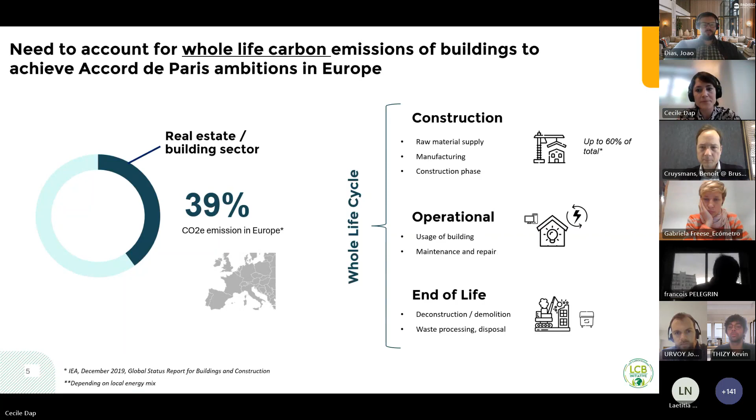But to adopt this whole life carbon approach, to reach this counting of carbon in the entire life cycle, there are still some barriers in Europe. The first of them being the lack of harmonization of the way we count carbon in Europe. There is, of course, a solid background of norms defining life cycle analysis. So you must know EN 15804 and so on.

But there still are multiple ways of using those norms. So because of this, for the European players, it is still complicated, even sometimes impossible, to compare the carbon footprint of buildings across borders. And because of this, it's also quite complicated to actually say what a low carbon building is in Europe.

And there's a recent Ramboll study that has been conducted for the EU that has said that most of the real estate players in Europe also think that it's necessary to have this single, same way of measuring the whole life cycle of buildings across the EU.

We also have a lack of transparency in the way we highlight buildings. So in Europe, we have lots of certification schemes. You must know most of them, but most of them are multi-criteria certification schemes that do not give carbon the central place. And when they account for carbon, it's very difficult to find the carbon result and highlight the carbon result within those certification schemes.

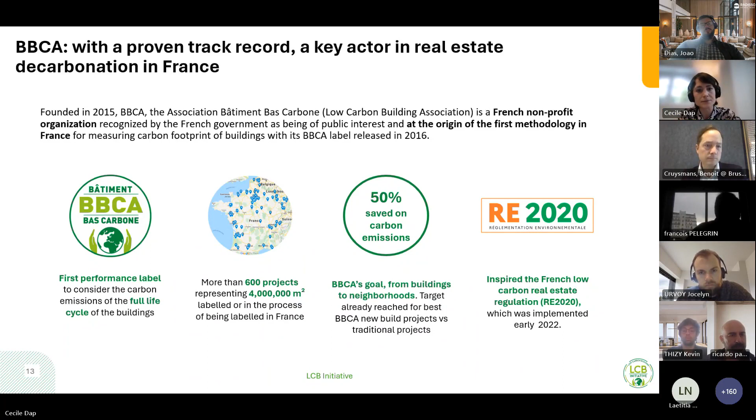So to come back quickly on the history of LCBI: it was launched in March 2022. The initiative has been a process of European policy and methodology benchmarking, then a definition of a first version of the methodology that was published in March last year. From then we gathered lots of feedback on the methodology, and we were able to test it on a pilot project. We have recently published this new version of the methodology and certification scheme in January this year.

I would say that this feedback process with more than 50 experts on life cycle analysis in Europe, and especially the testing of the methodology on pilot projects, was really key for us to not only have a theoretical methodology that works, but also something that can be used by real estate players on the ground, and people from all over Europe who were able to tell us that it works for them.

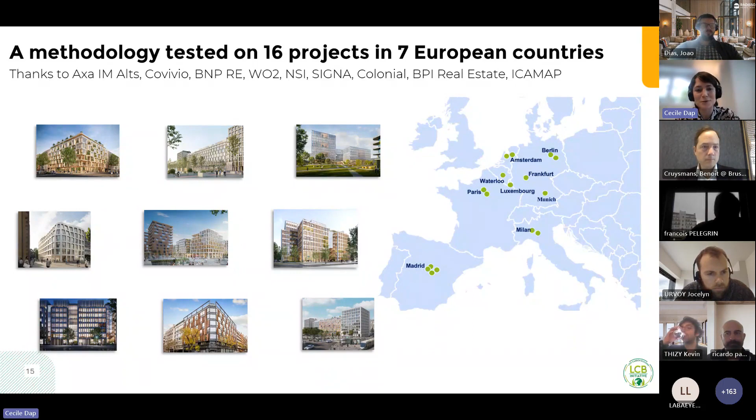So thank you again to all the contributors to this initiative and the pilot project teams.

Thanks to this process, we have been able to come to something that could be divided into two parts. On one side, the reporting methodology, so the way we account for carbon, that is meant to be applicable to any use cases and any building assets. So it could be used in any use cases you can think of. On the other side, the application of thresholds and certification schemes that are applicable only to specific use cases, because when we define thresholds, we have to define them for use cases and specific countries.

So for this year's publication, the certification scheme is applicable to new construction, offices, residential, and hotels, and in 8 countries: Belgium, France, Italy, Germany, UK, Spain, Luxembourg, and Netherlands.

So I'm going to now give the floor to Jocelyn and Kevin, who are going to present you in detail the new construction methodology, thresholds, and the way they have been building this whole work.

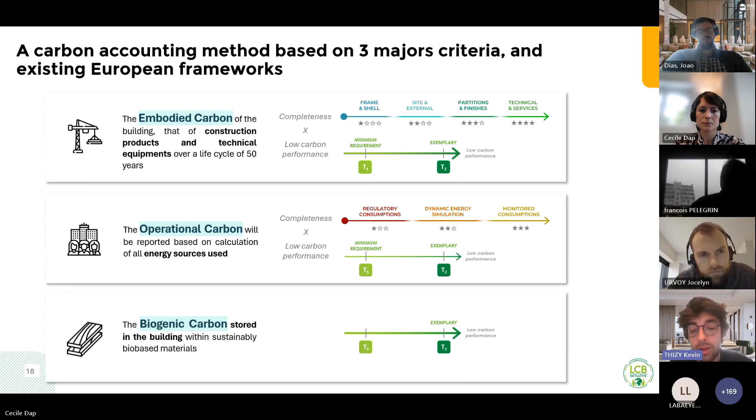If we can switch to the other side, yeah. So to have a quick overview, those 3 criteria are evaluated and assessed with basically 2 tools. The embodied and the biogenic carbon is assessed with an LCA calculation over 50 years. And as I said, the score reached will be a combination between the completeness and the target reached.

And for operational, the energy consumption calculation can be made by calculation on software and/or also based on monitored consumptions. So again, we combine performance and completeness, and the consumptions are assessed on a yearly basis. So the 3 criteria are combined, and then we assess the number of stars and targets obtained, and then we reach the LCBI final rating, beginning with standard, then performance, then excellence. We'll see it after that.

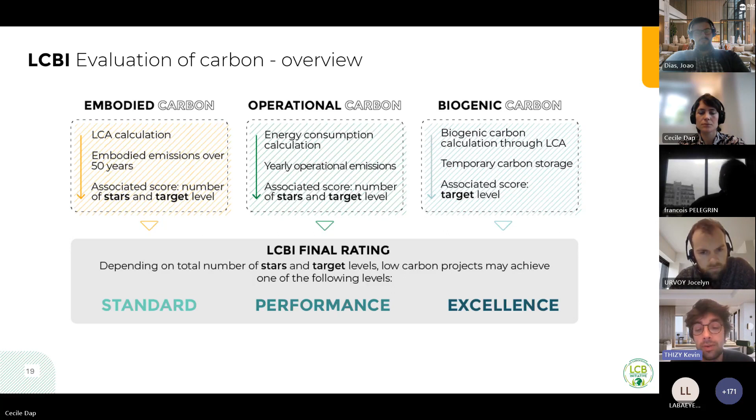A bit of elements on the embodied carbon knowledge. An important element is the reference area. We refer in LCBI to the IPMS2 reference area, which is defined by the standard IPMS without the component H. So it is in the definition of the standard, but you have all the surfaces, the areas that are excluded - basically balconies, covered galleries, internal car parking and storage room.

Then we assess the embodied carbon on the scope defined with 4 macrolots. It is inspired from LEVEL(s) and also RICS allotments. Again, we have to be at the crossroads and also give LCA practitioners a real way to assess based on what the projects give information to them.

So those 4 macrolots start with frame and shell. If you assess only the LCA on the frame and shell, you reach 1 star. Then if you assess the site and external products of your building, you reach a 2nd star. After that, if you go into your building and you assess the partition and finishes, you reach a 3rd star, which we assume is mainly the way to assess LCA for what we saw actually. And after that, the 4th star is when you assess the technical and services of your building, all the MEP.

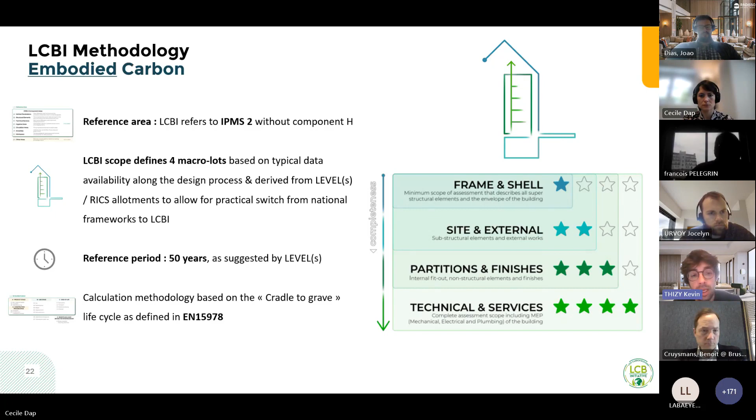Here you see all the life cycle stages that you can assess for your building, from A1 raw material supply to C4 disposal in end of life stages. And for embodied carbon calculation, we require to have emissions, CO2 emissions, on all these stages. So if EPDs are used without emissions on some of these stages, it will have to be completed.

For example, if you have EPDs only on A1 to A3, which is cradle to gate EPDs, you will have to complete it, whether with a software or with assumptions. So yeah, embodied carbon is calculated on that.

As I said before, biogenic carbon storage is an isolated indicator. So all the storage permits with biogenic products will be assessed on this indicator from A stages to C stages.

And operational carbon, which is also CRREM and Scope 1 and 2 compliant, will be isolated also to get to be the third criteria. Just note that D stages will be reported separately and not accounted in the embodied carbon.

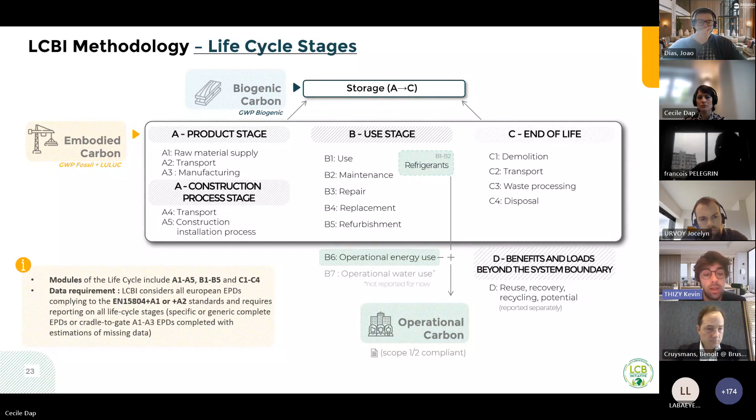And in LCBI, just to be clear, we allow to use EN 15804 plus A1 and plus A2 EPDs, assuming that they are completed on the scope A1 to C4, fully completed.

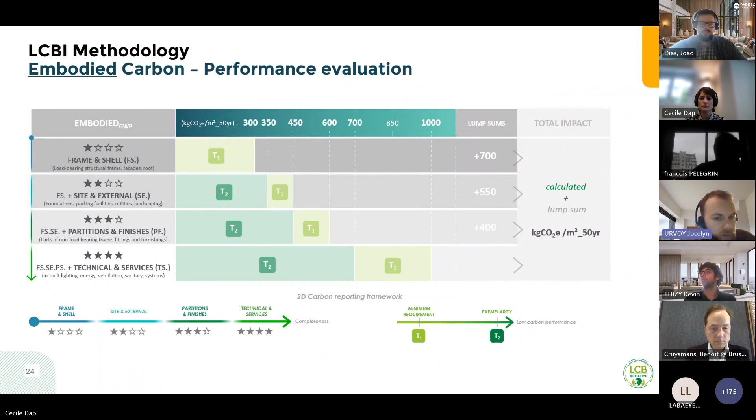You'll find this principle being repeated also for energy and operational emissions. I'm going to explain a bit how the thresholds were set, because it's been quite an interesting process as well. Throughout the LCBI project, we've been able to confront those thresholds to some statistical analysis.

This was thanks to some data initially provided to us by One Click LCA, on which, after some processing to make sure that only high quality and quite complete life cycle assessments were analyzed, we ended up with a sample of a few hundred projects. We could assess the amount of carbon on each of those cumulative scopes: frame and shell, site, then frame and shell added to site and external components, and then partition and finishes.

We also have technical and services, but this is not deemed to be robust enough at this point in terms of quality of the MEP assessment. On this statistical analysis, you see median and mean values, and also what the top 25% is, which was quite useful to then compare to where we thought the thresholds could be.

That's the next slide. The main principle here, and it's not perfect science but it's quite a good indication, was to see that the T1 target was, especially on the third star - once you go as far as the partition and finishes assessment - quite similar to the top 50% of those LCAs deemed complete at this point. And the T2 target is quite aligned with something like the top 25%.

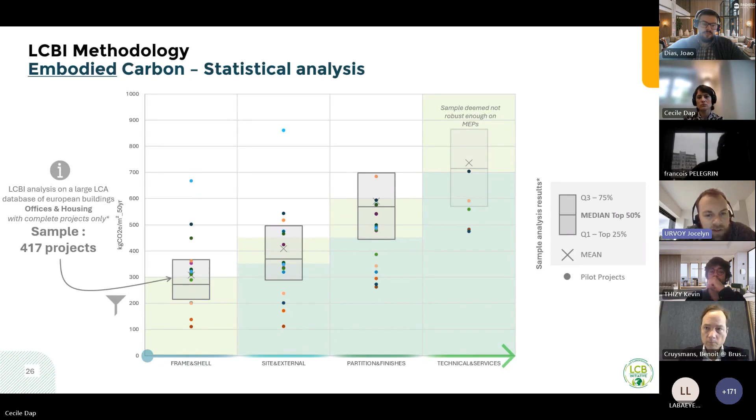This is quite a complex slide, but also something that I'm sure would be of interest to many of you. We've tried to compare how those thresholds position themselves against some other key initiatives, such as the national regulations in France or all the initiatives that are going on in the UK, or the science-based targets.

So here you see a sort of representation of the T1 and T2 values on whole life assessment as per LCBI on the right, a sort of indicative projection of what this would mean in terms of upfront carbon, so only stages A1 to A5. This is only indicative, but that's how some other initiatives define their targets, especially the science-based targets in terms of upfront. We see a general alignment.

It's not so easy to compare things apples to apples, but overall it seems that the T1 and T2 targets are based on the same ambitions as some other initiatives, and that's quite reassuring.

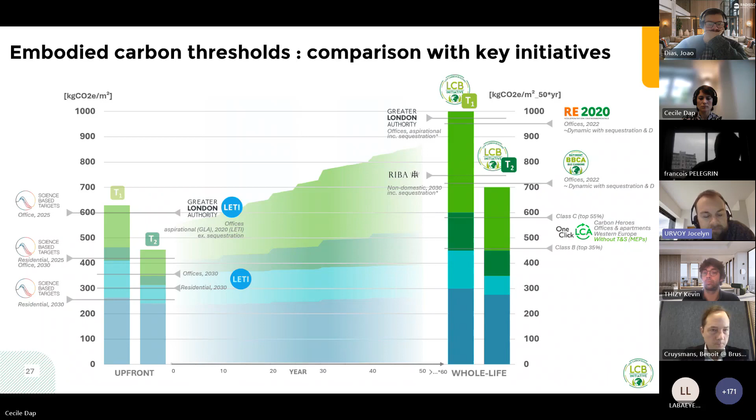Now, in terms of operational carbon, there was some work done to be able to define thresholds, but accounting for the very differences between countries in terms of the carbon content of the electricity and also some other differences that may be expected from one country to another. The first one was to find how to define the scope of the calculation.

We know that the national calculation methodologies that should follow the EPBD are meant to report energy consumptions on 5 main usages, so heating, cooling, ventilation, hot water, and lighting. But this is only one small part of the energy consumption, and some more complete assessments are also quite useful to be made based on dynamic energy simulation or even monitored consumptions for those buildings that have been delivered already.

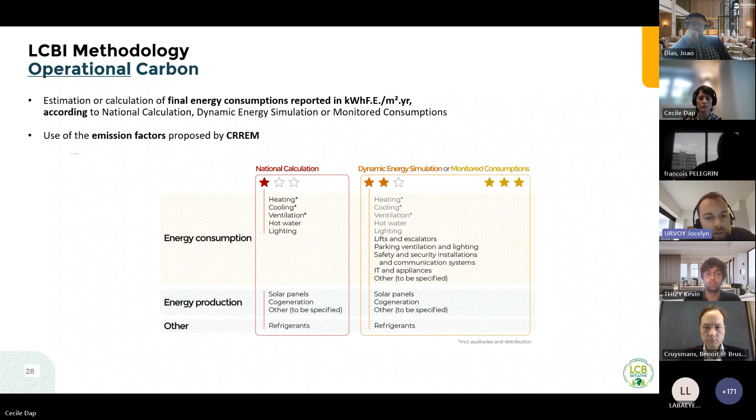And once this assessment has been done in terms of energy consumption, taking into account the refrigerants and the energy production that may be on site, there's the need to translate it into carbon emissions. For this, we based the analysis on the CRREM emission factors, thanks to the very valuable and high quality work that was done by the CRREM, and this is the source of data that we chose to be able to define the thresholds. I'll go a bit more into detail on what was the process for defining those thresholds.

So basically, we carried out 2 sets of generic simulations with 2 sets of design parameters. One that would be the base scenario, and one that would be the best scenario in terms of all the assumptions that you make when you carry out an energy simulation. So we did that in 3 cities in each country, just to understand how the energy consumption would vary from one country to another. Some countries need more heating, some countries need more cooling, and overall, we can see that it's actually not so different from one country to another.

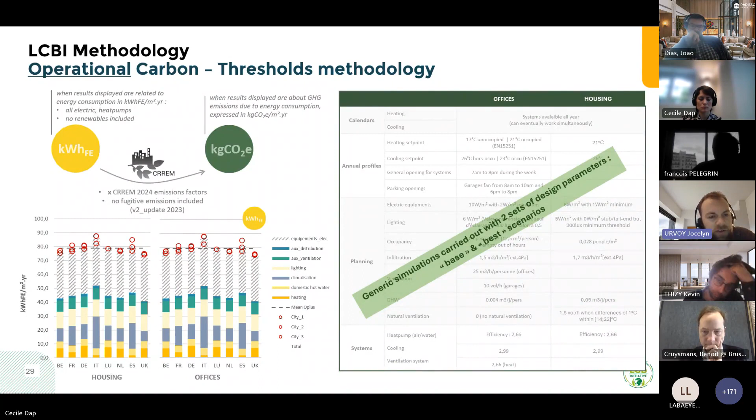This was then translated into CO2, that's the next slide, based on the emission factors from the CRREM in the 2024 set of emission factors from one country to another. So from there, when we talk about carbon, then there are very significant differences. That's based on the electricity grid from one country to another.

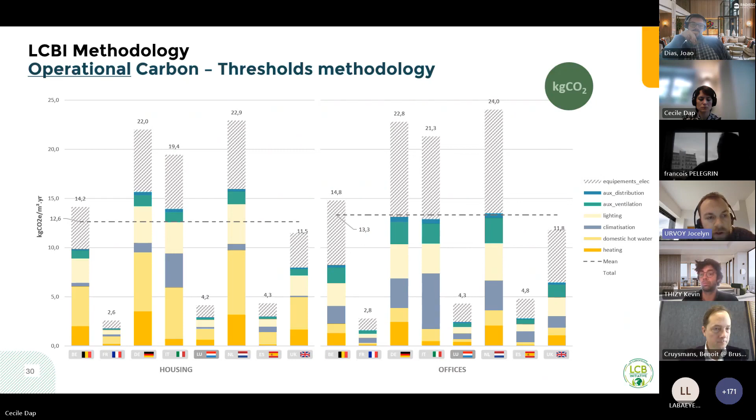And this set of data was then used and compared to some other benchmark that was given to us by the CRREM. That's the next slide, where you see here on the left the energy consumption, and on the right the associated emissions.

So on those two charts, what you find on the left, the orange line is the energy pathway set out by the CRREM, where you see that there's a sort of flat value after 2035, which is what the CRREM expects from the average building stock, and could be quite a good proxy for new buildings. And then you see our base and best scenarios, how they position themselves in terms of energy consumption that was simulated. And this was also useful to help us set thresholds. When you translate it into CO2, then you jump to the right-hand side chart.

This flat value after 2035 is the orange dotted line on the right, which was our basis for the T1 target on energy consumption. This was quite useful to compare how the base and best scenarios were placing, and basically the T2 target is usually set quite close to our best energy consumption scenario.

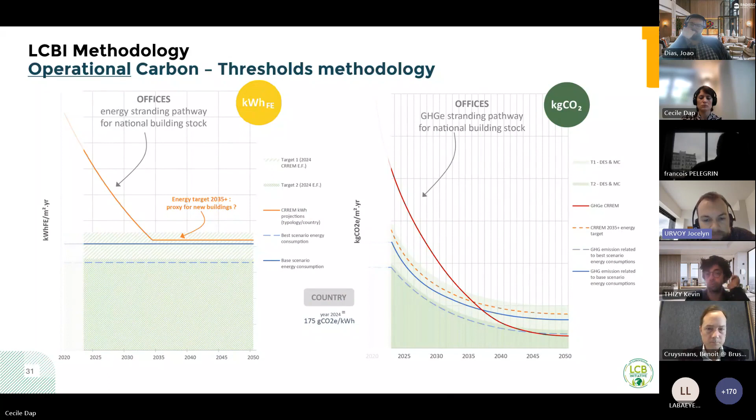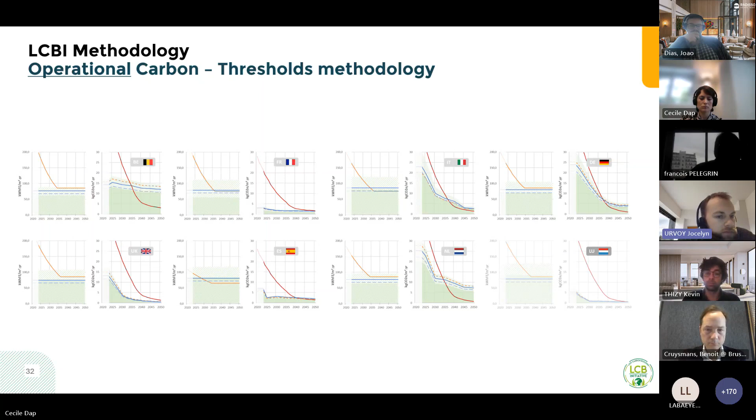So this was a generic representation, but the work has been done for every country, and that's how the thresholds were set. I think this is all available in the LCBI methodology, and that's how you end up in the next slide with this rating framework. So the requirements vary from one country to another based on the electricity grid. There were some assumptions made in terms of energy supply, but basically electrification is one of the key assumptions that was made.

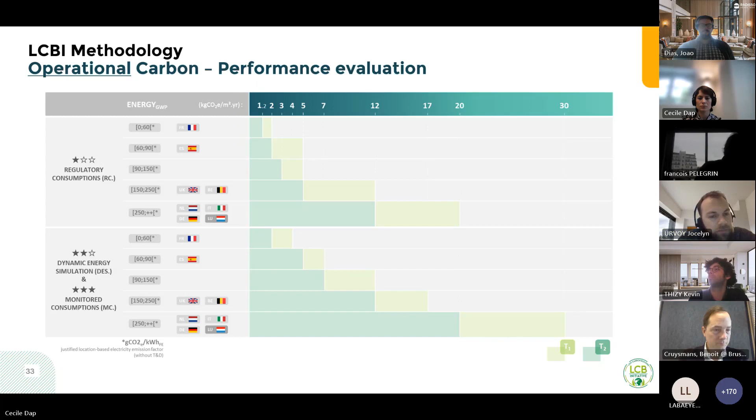Yes, I'll take the microphone.

To continue on the third major criteria, we are now on the biogenic carbon storage. So this isolated indicator has been made in the LCBI methodology in order to align with a kind of consensus across Europe. So the biogenic carbon storage is expressed in kilogram CO2 equivalent per functional unit given by the EPD. Also, when you do LCA, you report it separately, and this is made in order to value the carbon stored within the building at any point in time of the LCA.

So it is neither deducted in A1-A3, nor added in C modules, as it can be in some of the countries' national calculations. So this also values alternative sourcing of carbon intensive materials without hiding fossil emissions, because that's what was made with, for example, the EPDs made in 15804+A1. We cannot see the biogenic carbon storage. It was summed in the overall emissions of the product. So now we can see how the building participates in the storage of the carbon emissions of the atmosphere.

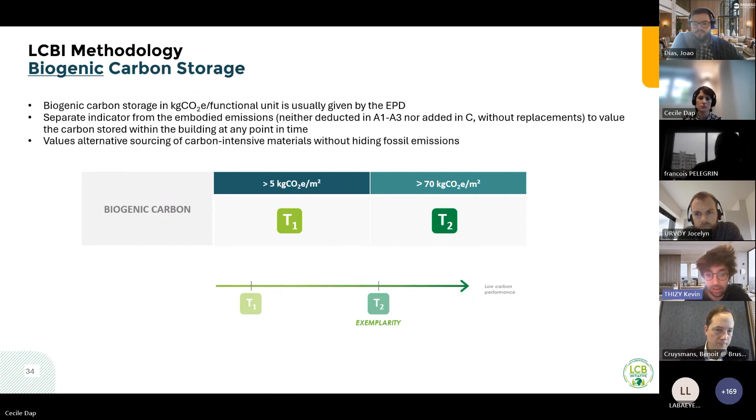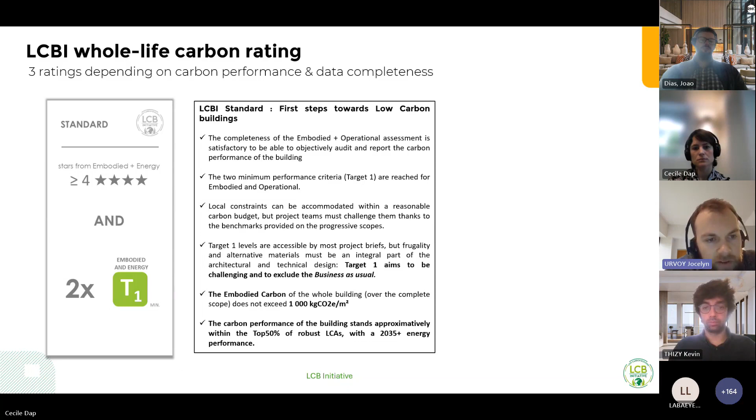The next level is LCBI performance, a bit more challenging. We expect those projects that reach LCBI performance to align with the best practice in terms of completeness of the assessment. At least one target 2 must be achieved, and this means really trying to find the balance between energy performance, site constraints, and efficient and low carbon materials. And this is something that should inform the design process, the project brief, and be quite a thorough work to be carried out so that the performance level can be achieved.

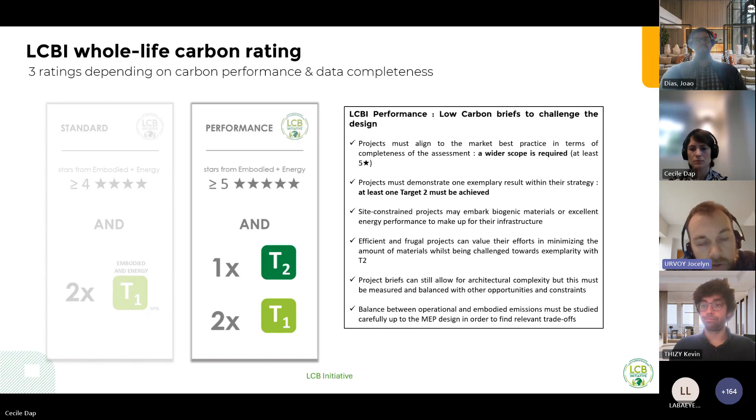And then you've got the excellence, which is really meant to highlight those projects that have been exemplary on all the work they've done. The assessment is meant to be as complete as it can be as of today. It really should be an effort to challenge the design on all types of works and find a very challenging energy performance, so that those projects could land within the top 25% of those projects which have consistently reported their emissions. And basically, this would mean having reduced their carbon emissions by at least 30% over the entire life cycle compared to what we see as business as usual today.

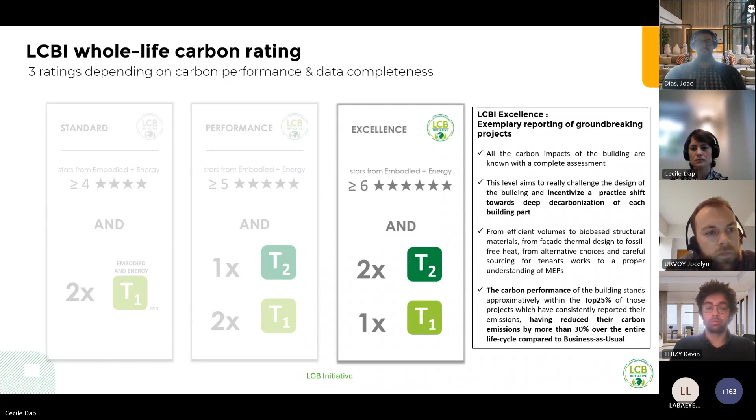Thank you, Jocelyn. Thank you, Kevin, for this detailed presentation. I can see there are lots of questions on this in the chat. I suggest we take them at the end of the presentation or answer them now in the chat. So as next step, we're now going to present you the certification process and also a bit more on the LCBI initiative.

So as we mentioned earlier, this LCBI, these thresholds that have been defined and the certification scheme that is going to be audited in 8 countries by Bureau Veritas, is available for new construction, offices, residential, and hotels. And in those 8 countries, of course, it's the first step of addressing more categories of assets and use cases in Europe, and also more countries. So if you're ever interested in working on one or other subject, feel free to contact us to extend this LCBI certification scheme.

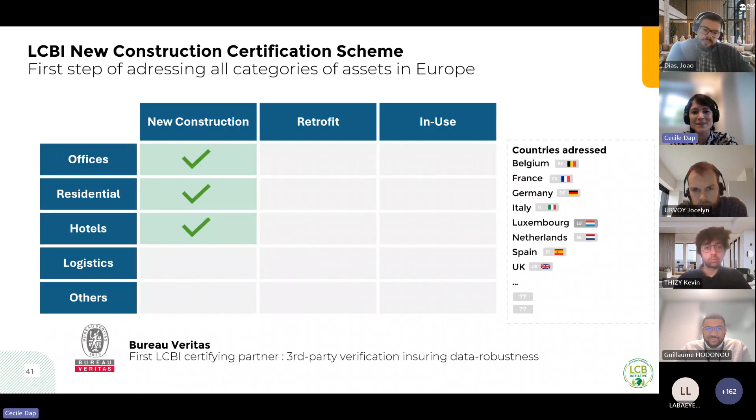I'm now going to give the floor to Guillaume from Bureau Veritas. So Bureau Veritas is the first partner certifying LCBI in 8 countries. And just a quick word on this: having a third-party certifier ensures a robust data verification, and also ensures that in the end, all the data that we're going to collect from those buildings are compliant and reliable, and, as I saw a question in the chat on this subject, thanks to Bureau Veritas as a third-party certifier, we also might be able to gather the data anonymously and provide the market with some knowledge on whole life carbon of buildings that conduct this LCBI assessment. So I give the floor to you, Guillaume.

Yes, thank you, Cécile. So as a commercial manager at Bureau Veritas, my objective today is to guide you in the process of obtaining the LCBI certification. It all starts with an assessment of the eligibility of your application, conducted by our technical team based on the information you have provided.

The eligibility criteria, for your information, are defined in the certification standard, which is available on the LCBI website if you want to consult it. Once you are considered eligible, you have the opportunity to be audited and to obtain the temporary certificate, a certification that arrives before the construction of the building.

After the audit, the auditor generates the audit report and monitors the closure of findings based on your feedback. Finally, the certificate is issued within 10 days following the closing of the findings. In a second phase, after the building has been built, you can obtain the final certificate following the same steps as the temporary certificate, including the audit reports, closure of the findings, and issue of the certificate.

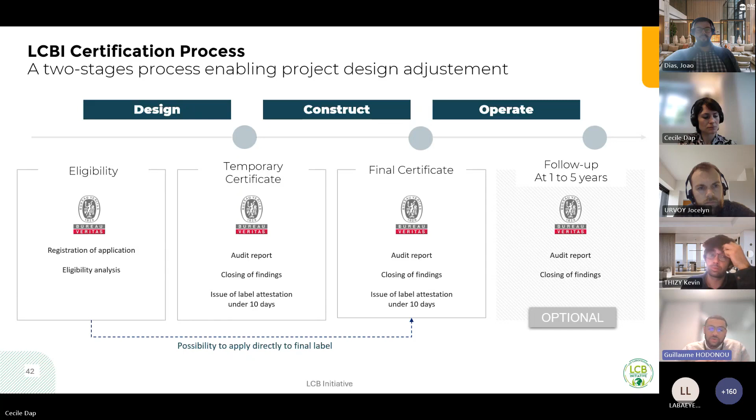Yes, could you? Yes, thank you.

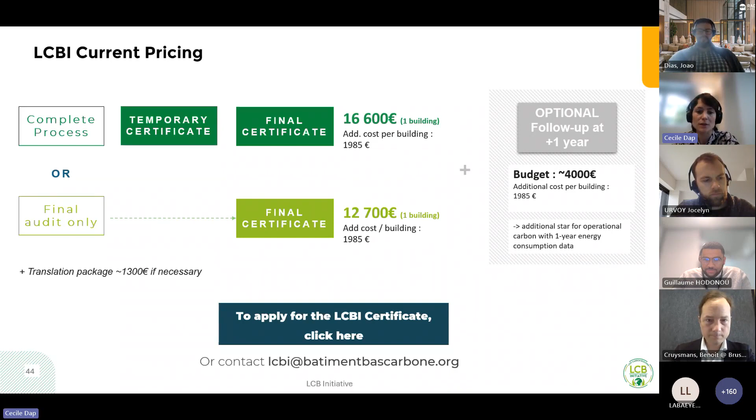Then to give maybe a wrap up on the LCBI certification scheme and what are its benefits, I would say that for the market in general, it answers the needs that we have seen at the beginning, having a common methodology to speak about whole life carbon across borders and with thresholds in order to be able to set some benchmarks and drive low carbon practices for all real estate stakeholders.

More specifically, on the investor side, it will provide them the ability to access consistent and reliable performance data on whole life cycle carbon footprint of buildings. Those data at asset level, thanks to LCBI, will be based on the same accounting methodology across borders. This is actually today something that is missing in order to drive investment decisions according to whole life cycle carbon footprints.

And thanks to this, it will also give them the ability to compare and compute those performance data on carbon footprints at a portfolio level across borders. Then, if you move to project owners and developers, as it was explained very well, and as we also noticed during the application of LCBI in the pilot phase, LCBI can be used as a low carbon design tool along the entire design and construction process.

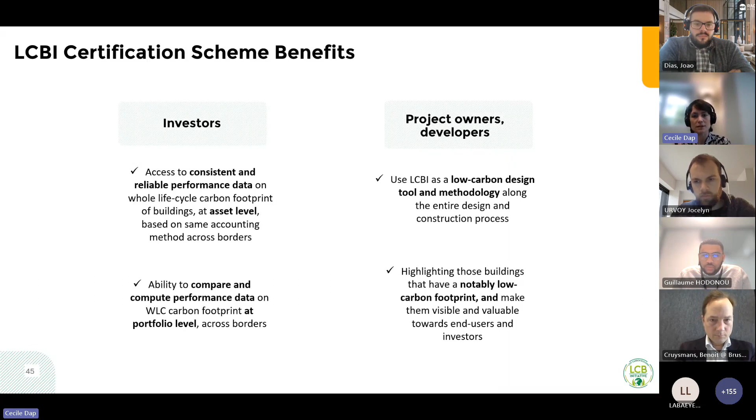So to answer some questions I've seen about the next steps and other categories that we are going to address through LCBI: building such a methodology has been a huge work and a long process. Now we also have the work of explaining what we are doing and developing it. In terms of categories and asset types, in 2024 we are working on the decision to address the logistics asset types and, to be confirmed, defining a roadmap to address retrofit in 2025.

But of course, in the process, as you have seen, in order to address either a new country or a new asset type or category, what we need is interested stakeholders that have assets and teams that are ready to contribute and test the methodology on their assets. So if you're interested, you can either try the methodology right now on your assets or contact us to define a next development for LCBI. So don't hesitate to contact us.